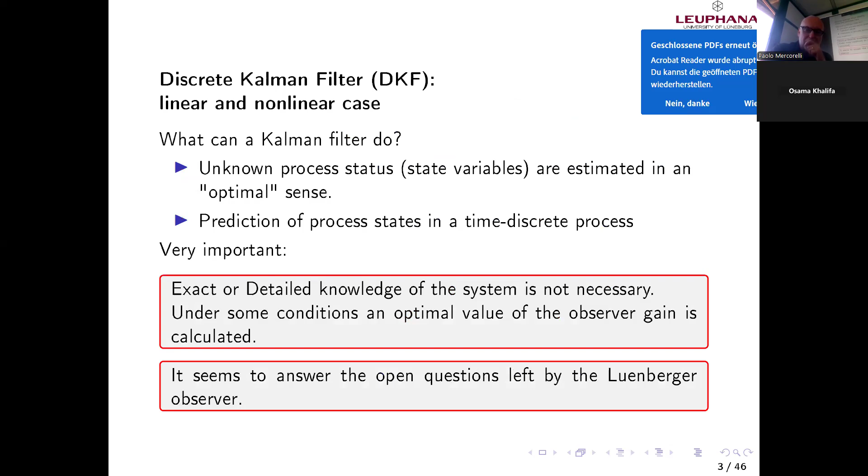This KM apostrophe is just an annotation from a particular book, where we consider radian per second instead of round per second, if I remember well. Anyway, it's a constant which characterizes the model. We can see that this constant here is exactly the same constant. Basically, the Lorentz-Lenz effect in the ideal case is exactly the same - it's the dual aspect between Lenz, induced voltage, and Lorentz effect. You probably know this coefficient better than me.

This is the continuous system which we want to control. At this moment, we want just to observe, to estimate something which we want. But the idea, as I told you last time, why do we need an observer? Because in particular, to control, we are here for cybernetics, and cybernetics means control.

In the most important, or nowadays newest control strategies, MPC, sliding mode control, we need the states, all states, very often. We have seen MPC, we have seen sliding mode control, because it's model-based. The control strategy is model-based. This means we have to somehow reflect the model into control. If, for instance, some variables are not possible to be measured or too expensive to be measured, they must be estimated or observed.

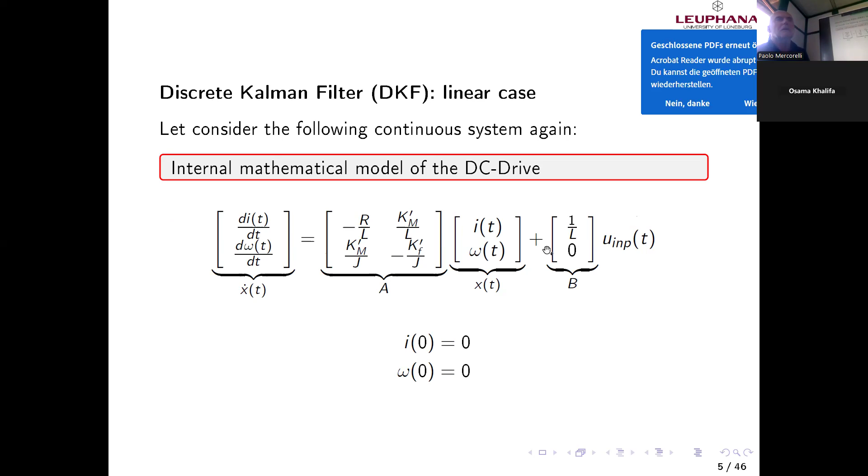Let me show you what I am doing now with the Kalman filter. Assuming it's too expensive to measure omega, for the controller, model predictive control, I need both current and omega in order to predict what will happen and try to control it. This is needed necessarily for both, also in sliding mode control because it's also model based. But let me consider MPC because I like it more.

This means I have to measure something, because if I don't measure at least one state variable which reflects one energy, the others cannot be estimated. I didn't have time to tell you about that, it could be later.

If I have time, I'll tell you later. Before designing an observer, it should be reasonable to check if the system is observable. Observability is the structural characteristic of the system, but also depends on what I measure. Sometimes measuring some state variables makes the system observable, measuring different state variables makes it not observable. If I measure everything, of course it's observable because I have information directly on everything, but we don't want that.

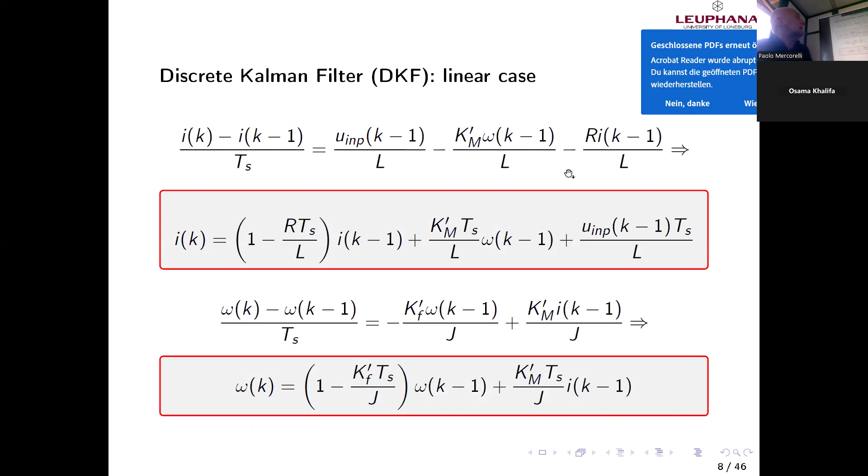You remember, I don't consider the noise. This is the limit of the Luenberger observer with respect to a Kalman filter, which considers also - we will see in a few minutes - something unknown, something which I don't know, or don't know perfectly, and noise, which is also something I don't know. Because the noise is characterized, if it's Gaussian - the hypothesis for today - we also have Kalman filters in which we remove this hypothesis of Gaussian noise, but even Gaussian noise is characterized by a sigma. It's not deterministic - this means we don't know perfectly the noise, or sometimes, as we will see, some parameters.

Here's a way to represent the discrete system using direct matrices. I would like to skip this because I told you last time.

Now, the Kalman filter. The Kalman filter basically considers the same elements as in the Luenberger observer, but look here - we are considering the system noise, in which the dimension of this vector is the same as the state vector x, because we consider the same dimension. This means we can associate to a state variable a vector, which is the noise. We will see that this noise, at least today, must be Gaussian, but we have also variations in which it's not necessarily Gaussian.

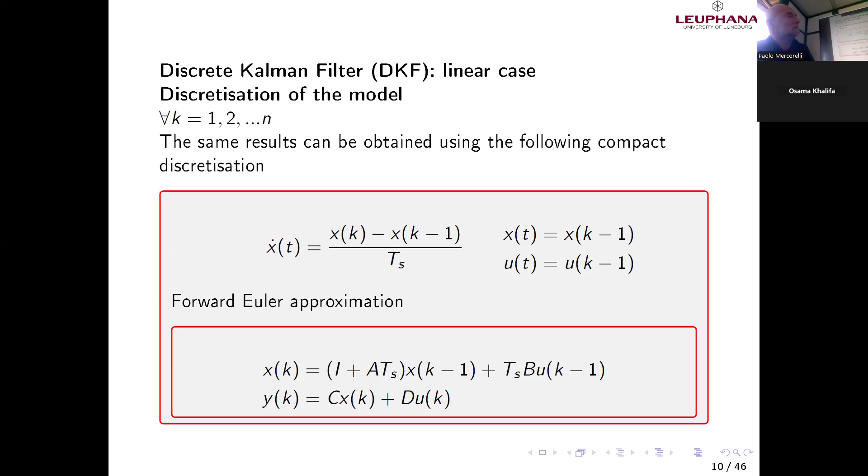We will see the Kalman filter, which is a particular observer. Assuming I want to measure the current, I want to estimate both, because it's always better to use the estimated instead of the measured. It's easy to understand - look at the word filter. If I have noise, probably - not always, it depends on the filter, it must be optimal - if I try to throw away the noise, it's better to use what I am estimating instead of what I am measuring. If I have a measurement totally affected by noise, and I filter it a little, I can assume that it's better.

It should be not too much and not too little, because if it's too much you introduce a phase delay. If you have a lot of noise and you filter it, you get a very clear signal, but it could be that you introduce a delay in the signal. Understand what I mean? Because you throw away also the dynamics which I want to have. This means it should be optimal.

A Kalman filter, it is. Here again, H was at the beginning C, and in the Kalman filter very often they use H. I copied this from a book, no?

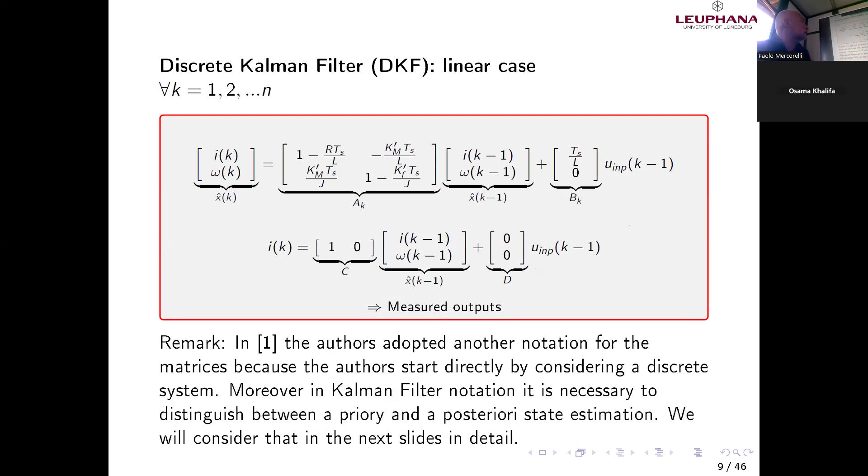In Luenberger, or in general, we use C in order to show you the analogy or duality between controller and observer. C becomes H typically, not always, in the Kalman filter. And Y becomes Z. The new thing is just this: we have a measurement noise.

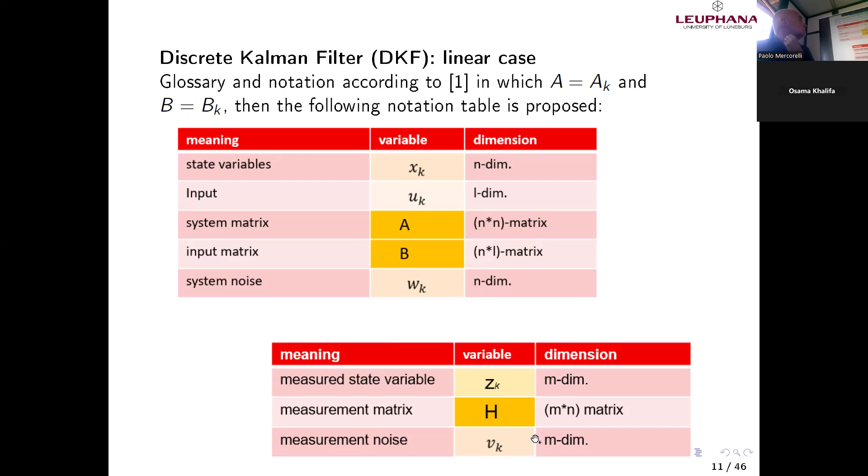I told you we have basically two steps: a prediction step and a correction step. Let me accelerate a little bit.

One minute to dedicate to show you again this slide, in which we can see what we consider now as the system, or better to say, the true system in accordance with the framework of Kalman, which has the deterministic part characterized by A and B, plus a stochastic one.

We can see the form is forward: K minus 1, K minus 1, K minus 1, on the right part K. In which we have also here, as we see in the Luenberger, but we have W K minus 1.

Look at this hypothesis a little bit, very quickly. We can see that the normal probability distribution in most cases for W and V must be Gaussian - N means normal, this means Gaussian - mean value 0, and characterized by this covariance matrix. Q is the process covariance matrix, process noise, better to say, and here is the measurement noise covariance matrix. Very important to repeat this hypothesis.

Basically, we assume that these two noises are independent. This does not influence each other - white and with normal probability, as I told you directly. Moreover, I would like to say, sometimes normal implies mean value 0, but it should be better to write mean value equals 0.

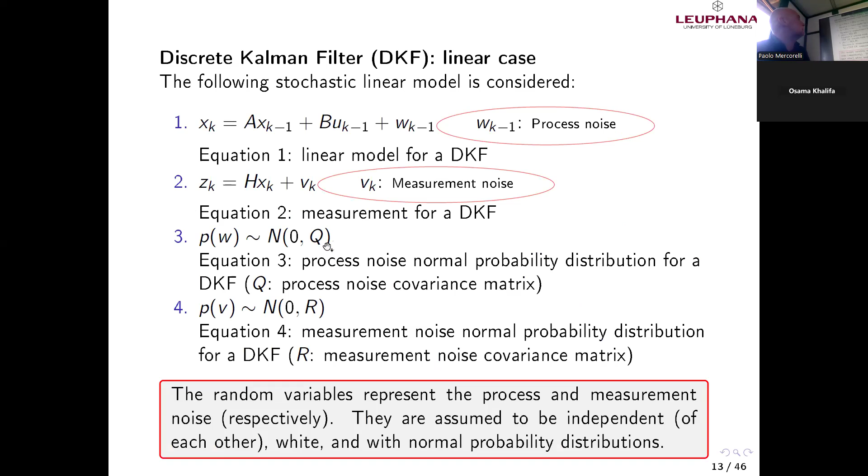Again, the definition of the covariance matrix, which I would like to skip because we have seen it last time. This matrix Q - the reason we are speaking about matrices is because you have many variables. This means we have to consider the interconnections in between, but here in the middle, colloquially speaking, in the diagonal, we have the variance. Sigma typically is the standard deviation, which is the root of the variance.

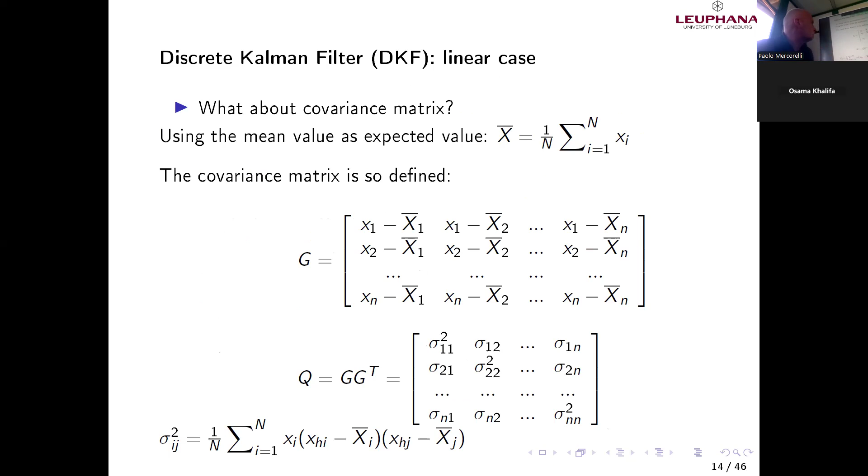Anyway, I would like to speed up. You remember I told you about the equation which is the a priori estimation of the state. This means, in accordance with the deterministic model, I can predict. Similar to what I told you in MPC. Now I have the deterministic model, I predict.

The prediction is based on the deterministic model, but please pay attention here - that is not like MPC. Look, here we have X hat, which always means a prediction, because it's not exactly the true value, even though I told you here the true is the Kalman true. Now we will come back to what is the true, because the truth doesn't exist.

As I told you, in accordance with some hypotheses, what I am observing, what I am estimating, is much better than what I am measuring. But what is better? At least we can say that we get close to the true, because the measurement is affected by noise. This means in the measurements, in reality, we have something which is true and something which is not true, or better to say, something which does not belong to the system or to the phenomenon, because it's introduced by errors, in a sense.

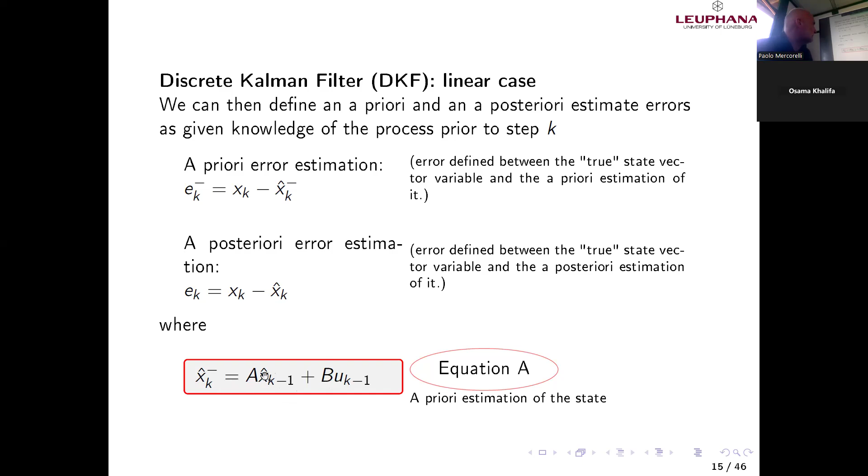We will use the previous estimating. Now we will see what x hat is. This is the true in accordance with the Kalman. This means what is the true in accordance with the Kalman? Is what I know, I assume that I know A, in my knowledge, assume that I know B, plus what I don't know. This means Kalman says, if the reality exists, it's what I cognitively know, plus what I don't know. It's easy to understand, this sentence could be acceptable, no?

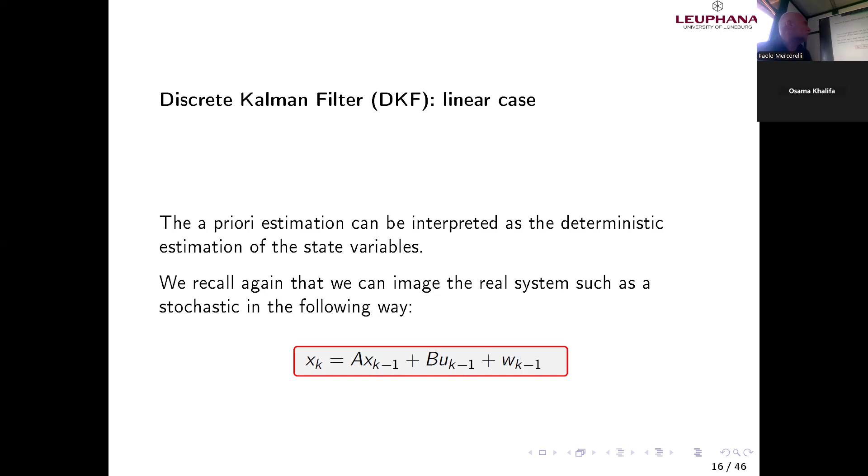The reality is what I know plus what I don't know. But what I don't know in this context here should be Gaussian and not only independent. And so what I told you also better last time, now I'm trying to do very quickly.

I can demonstrate, and I would totally skip the demonstration. I did a little bit better last time, that an a priori estimation of the error covariance matrix respects this law here. We can demonstrate it, because I can consider two kinds of errors. An a priori estimate error, which is the true, Kalman true, what I know plus what I don't know. This is the true. I can speak of the true just in the sense, according to the hypothesis, as a Gaussian, normal. I would like to add, to be clear, mean value 0, everything.

And another error is the a posteriori estimate error. And of course, I will generate also this a priori and a posteriori error covariance. I don't know if you remember statistics. Let me go ahead quickly, but you can find also in this slide many information about that.

Here, the a priori, I told you, is the true minus the a priori estimation. The a posteriori is the true minus the a posteriori estimation. It's not clear what this is, not yet. This is clear, what I know plus what I don't know. This is quite clear because at least I showed you what it is. Or even though x hat k minus 1 is not clear, because it's related to this value here at the previous step, because it's not clear what is x hat. But assuming that it is the estimation of x.

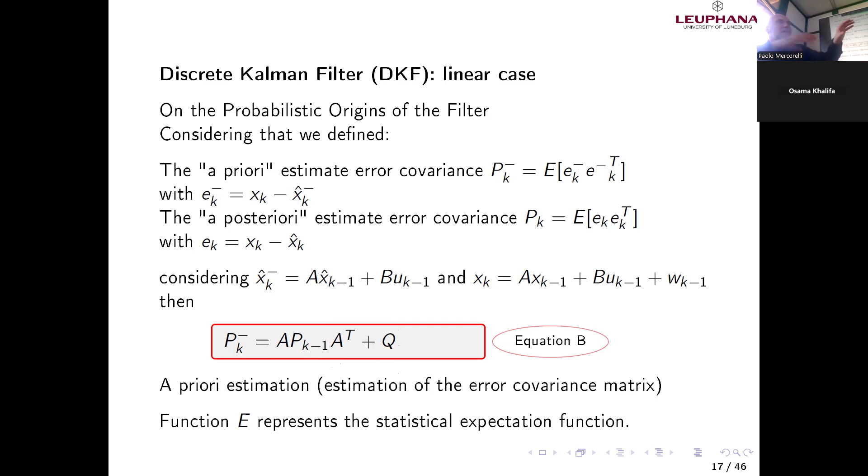Let me skip everything because we would like to apply this. Look at equation C. If I assume that the estimation of my true xk, the true in accordance with Kalman, can be considered as a linear combination between the a priori estimation, which is particular because it's recursive, plus k, which changes over time, multiplying this difference here, the name is innovation. What is the innovation? What I am measuring minus what I am observing or calculating, in the a priori, or better to say, the a priori corresponding variable. This represents somehow what I am estimating, which is a function of the previous estimation, if you remember, and basically the model which I know.

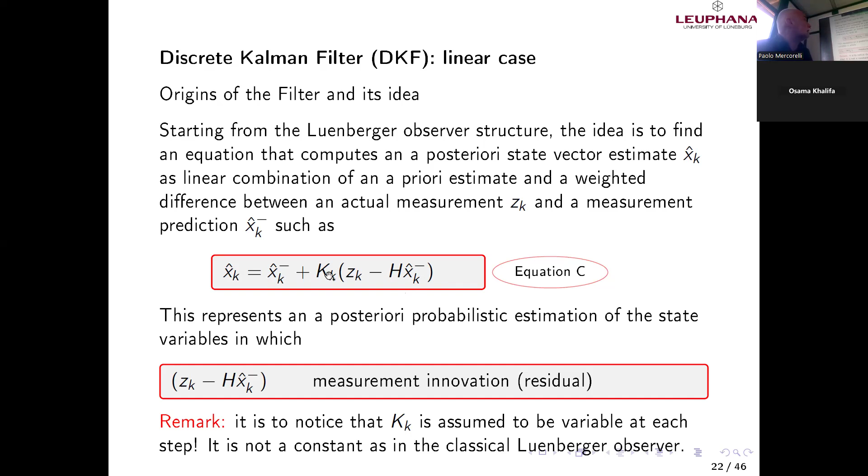This means this interesting combination. Mathematically, we can see that I can define an optimization problem to calculate k. Let me show you, let me skip this boring thing, but you can see.

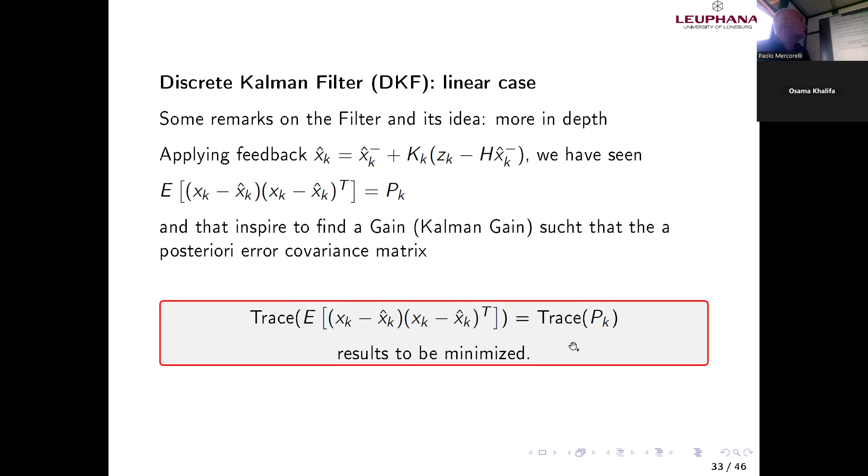Now, very interesting to conclude, if I try to consider the trace of the a posteriori error covariance matrix, we can see the a posteriori error. E, this means the expected, we define our a posteriori covariance matrix. And the trace, you remember, is the sum of the diagonal elements, the trace of P. If I do this boring calculation, trying to calculate k which minimizes this trace here, I will obtain, believe me, skip everything, skip everything.

How can I do this? I do the derivative of this expression here. It's extremely boring. If you replace here the expression of Kalman, what is there? This was already shown, yeah. Believe me, it's extremely boring, but not too difficult to do this derivative. It is enough because the problem is convex. You have the linear system and the quadratic function, which is the sum of the diagonal elements. It's a convex optimization problem.

You know what convex means? Just one minute, just take this as a definition: you don't have many minima. We have to look numerically. We have an expression of k, which is this one, kk, which changes at each sample time, because everything changes, everything is there. Let me explain this colloquially.

Very interesting that everything depends on R and everything depends on Q. This is a really important key point. Q is here inside, I don't know if you remember. Q is here inside.

Extremely important because this Q and R, we will see together this another parameter which I will introduce now, which is the initial value of pk. It's something extremely interesting philosophically, because the reality is not possible to be known.

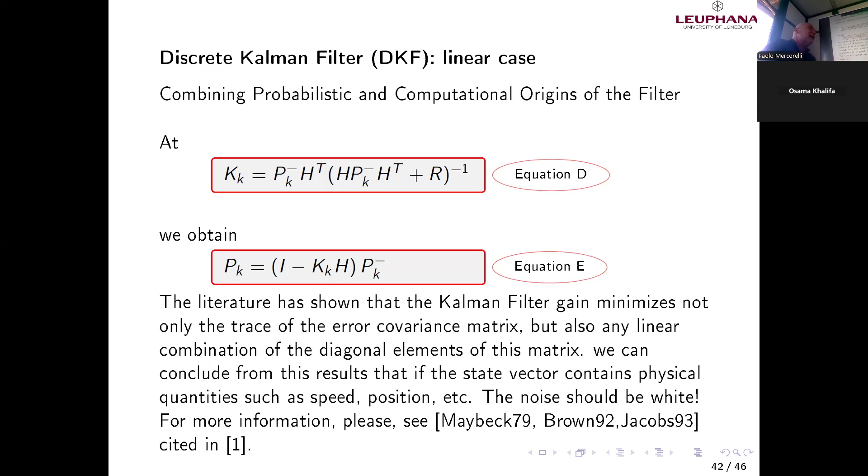Okay, this is the 5 equations which we need to implement in the linear system, which depend on Q and R, but also depend on the initial value of P0 or pk. We can see here the initial value of pk is the initial error. Remember, I told you at the beginning, if I don't know the value of current, if I don't know the value of omega, I have to put something, and this is reflected in the initial value of P.

Look here, in order to start, basically, I need Q and R. I need the initial value. We can see here, initialization of the state, and I need the initial value of the error. They are connected somehow.

To initialize. This is not so dramatic if I don't know this, because the Kalman filter can correct if I know Q and R. Q and R is not known. We cannot know it because the reality cannot be known. Also, we will see on the controller, we always have to tune something. Always. Of course, with artificial intelligence, we can get information at each time in order to estimate this parameter. But we can never say, now I know everything. No, the reality changes.

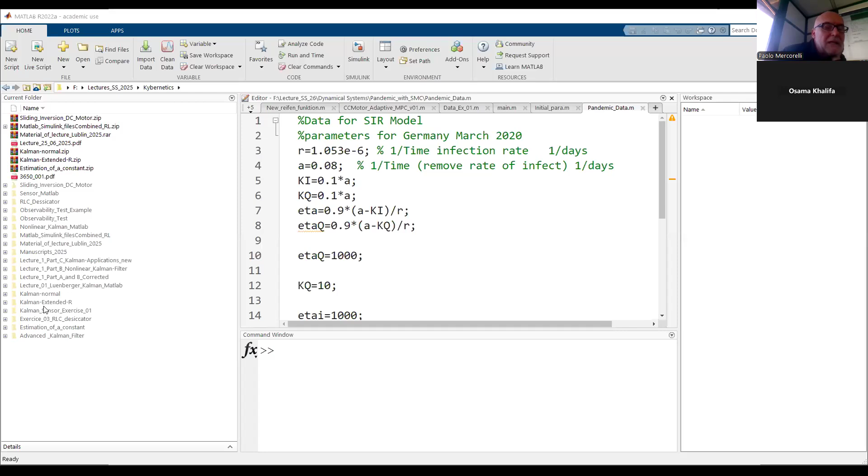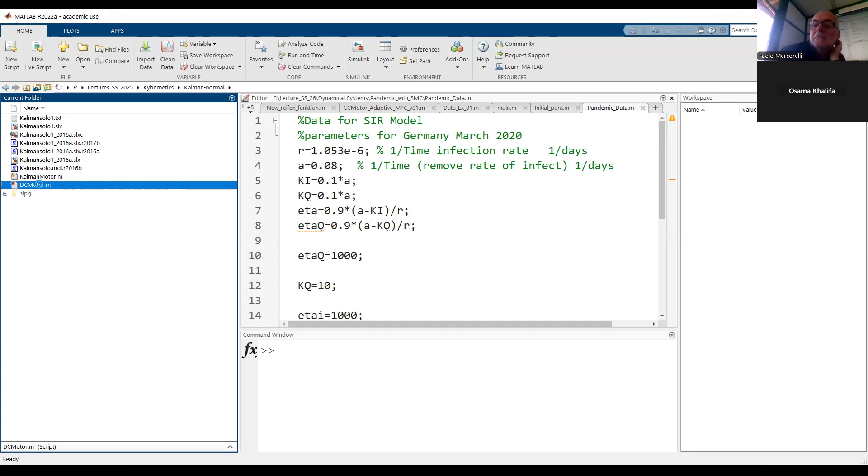Did you see Kalman? Okay, here. Let me open this DC motor. You can see that we have the motor, which you already know from MPC and so on. I don't need to comment too much on it. It is the real motor, but very small.

As I answered you here in one slide, probably you asked me about an error, but do you remember I told you it was correct in MATLAB? Yeah, MATLAB was different. In MPC. But I answered you, probably it's a LaTeX problem. Was it in the LaTeX? I think it was in the model, the model was wrong and the LaTeX was right. We can see here I put it correctly. Yeah, this is correct.

But in any case, don't trust the professor who does make errors. It's so, because how is it possible to say also here? The reality is in a form of error. Kalman understands this very well, and the idea is to distinguish or to minimize the error. Free from error doesn't exist in any reality. Also, the truth of Kalman is what I know plus what I don't know, which is an error.

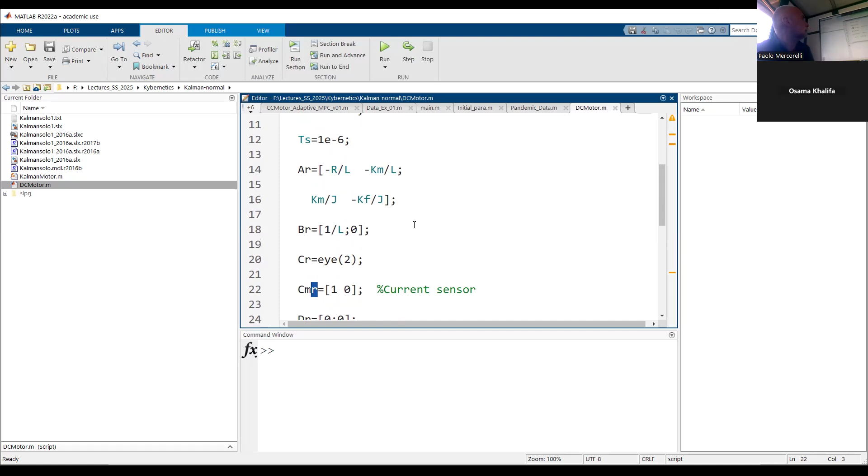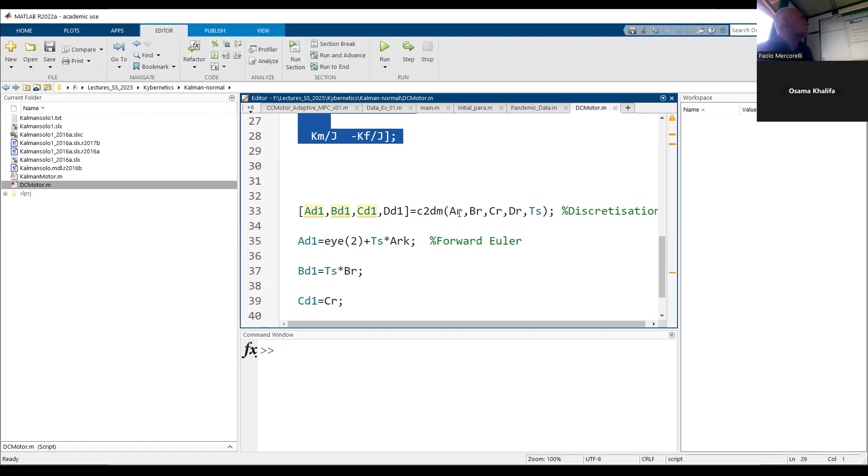Here I don't see any difference, I don't know what we have, this representation is the same. Here I use Euler. Probably we tested something, I don't know what. Here we have a possible discretization based on MATLAB. I think this means continuous to discrete mode. If I don't put any specification, I think this is the exact discretization. I don't know if you remember, exponential up to z, exponential up to minus ts, something like that. Anyway, it's another kind of discretization.

Here, we can see it's the last, because sometimes students ask me to test the performance with different discretizations. I can do it, but I don't have time here. But probably you already know, yes, it's forward. In backward it's a little bit different. Everything here is forward. Anyway, we can see that we use this forward. Let me run.

Basically, what we need here is the discrete model, or in this sense, the matrices. Let me open, I think this one. Let me see if this works. It's opening, yeah.

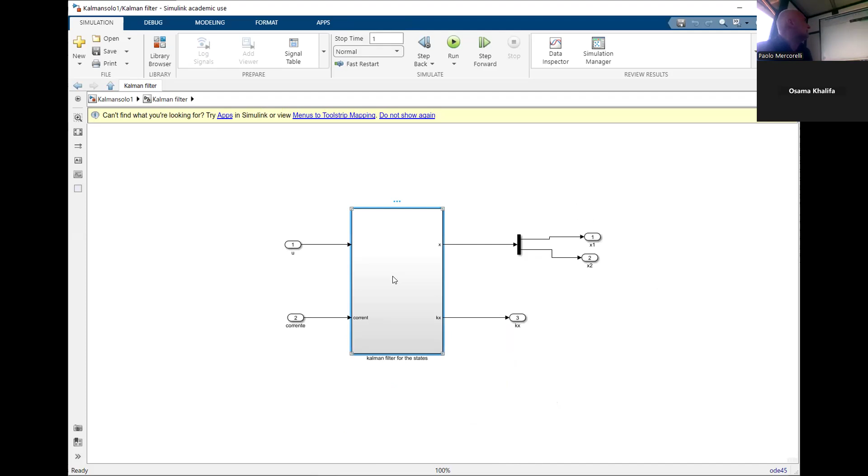Here is just for if I have more time. Anyway, let me go ahead here. Here is just the presentation. It's a shame, but not so much of a shame - I'm not using this embedded function. I'm using the interpreted one. I think it's also in MPC that I use the interpreted version.

The idea is that, in my opinion, didactically and practically, we always use embedded too, because we can flash out the electromechanical control. Here we have to explain what 'flash out' means. Let me come back to clarify this concept, because it's important, for example in Kybernetik, but probably you already know it.

When we are satisfied with the performance, we can, let's say, optically see what happens in the comparison, or we can measure the integral of the squared error, or we can look at the diagonal elements of the a posteriori covariance matrix. I forgot to say, but last time I told you, that here we minimize the sum of the diagonal elements.

But there is a theorem that says if the hypothesis guarantees minimizing the sum, then each single element is also minimized. This means the error of the current, error of the velocity. But it's a bit more advanced, and there's a demonstration, because they are orthogonal - I give you that as a keyword. This means to minimize the sum, I also minimize the error singularly. Think about it - in German it's called a Dreieck, a triangle with 90 degrees.

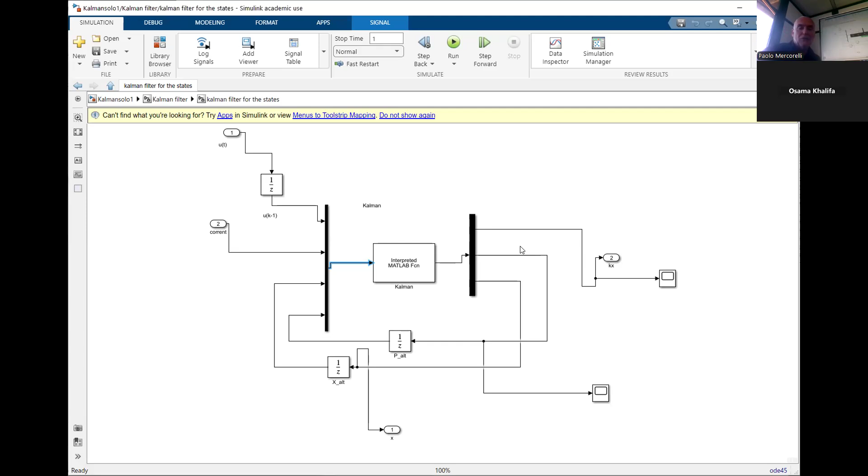This interpreted block is organized so you have to declare the number of outputs and the function which you call. In embedded, you don't need to, because you click it and it appears directly as the M file, which is this one.

Let me show you the M file. Let me share. I don't know, did I share? Yeah, I think so. Okay, yeah, it's there.

Sometimes I use the same name, but it does not matter. This is the name, but it's not the name of the function. It's the name of the function, but not the file. I'm more happy to work with embedded.

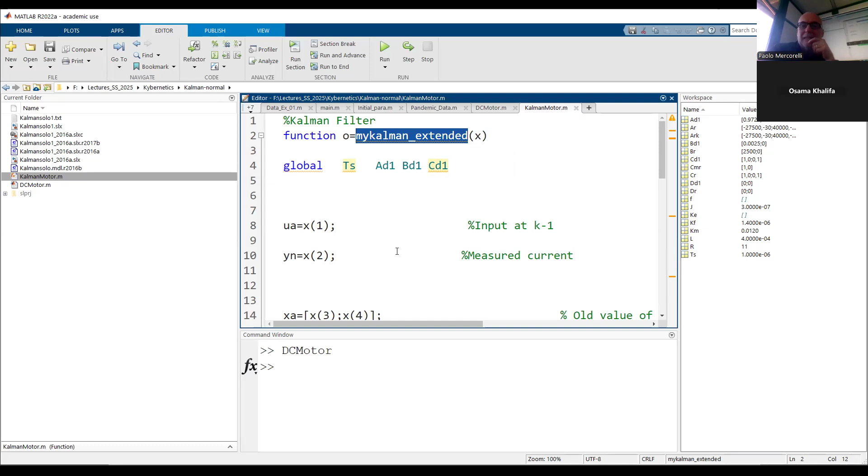Global, because in this interpreted block, we need to transfer from this value here. Otherwise, you don't need to, because you can put also here, as in the embedded, if I remember well, you can put it also here as an argument of the function.

But probably you know better than me about embedded, because I always use an already prepared file. I don't have time, but I think we can put it also here. Anyway, it's clear, no? X, what I need each time, should not be fixed once for all. I have to calculate each time, coming from the previous. And here, at this moment, I'm assuming that I don't have any changes in the parameter. Now we will see exactly what happens.

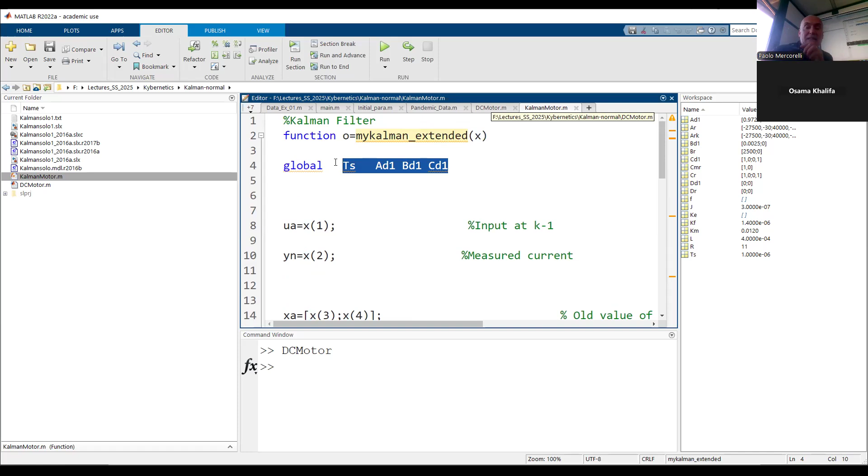UA, I mean, X1 was the input, the delayed input. I call it UA. The second variable is what I measured. If you want, I come back to the Mux. Do you want to see the Mux? This is yn, which is the current, the second one in the Mux.

And then the fourth one is this previous state, coming back from the output. Basically, x hat k minus 1, because it's delayed. Excuse me, today I'm going fast, but they come back then.

Now here, we can see that in this case, in the embedded block, I have to reorganize the four values which we have in the Mux. The Mux is something which vectorializes, basically organizing into a column vector, if you want. Then I have to consider elements 5 and 6, and here you have to consider the row instead of the column, and then I have to put also elements 7 and 8, which is in the column in the second row of the covariance matrix.

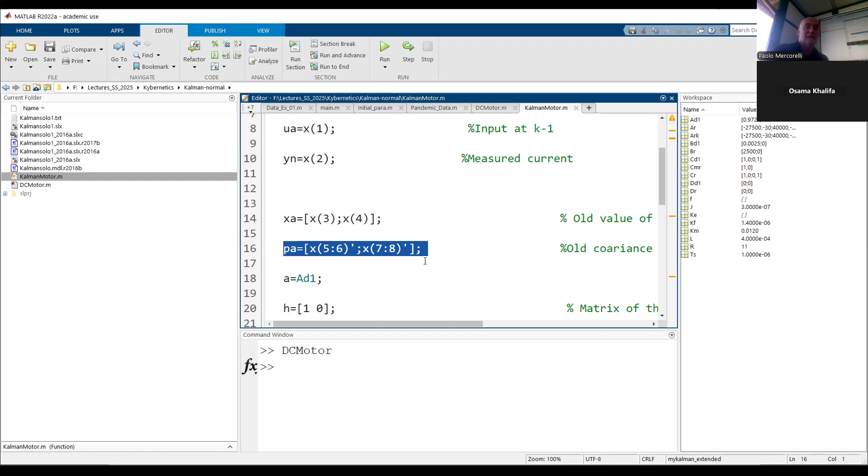And in this sense, this is the a posteriori covariance matrix, Pk minus 1, because it's delayed. Here it's already delayed. X is delayed, x hat k minus 1. Yeah, I changed the name. If you don't want changes, it does not matter. I don't know why I changed it.

We measure the current, first variable. Here I change again the name. This is a possible variance of the measurement. This means I trust the measurement.

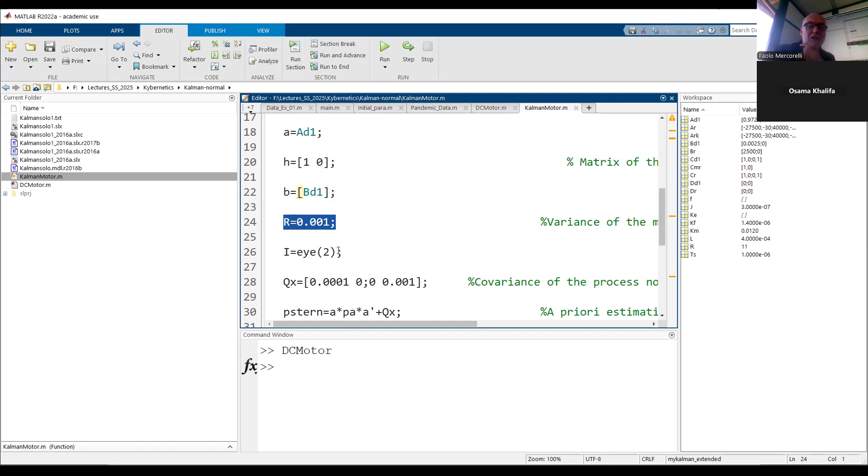Look here, you remember the concept from last time? Small r means small uncertainties in the measurements, because r represents the variance, covariance. In this case, it's the variance, because we have just one measurement. It's easy to interpret, and a small variance means relatively small. Very small doesn't mean anything by itself, but anyway, we will see it relative to Q. It's very small, if I remember well, when we look. This means I trust the measurements a lot, meaning that I will weight the innovation more.

KK will be emphasized, larger, because remember, R is present in the denominator of KK. I show you this in order to understand this concept. Let me conclude here. QX, where is QX? Here.

It's not so much smaller. It seems that I trust more, I trust the measurements more. But let me show you this aspect, it's extremely important, which is written in the slide. Look, a larger value of R means a small value of KK conceptually.

Larger with respect to Q means very small KK, because R works in the denominator. But a very small value of KK means that I don't trust the measurement. Why? Because everything which came from the measurement is minimized.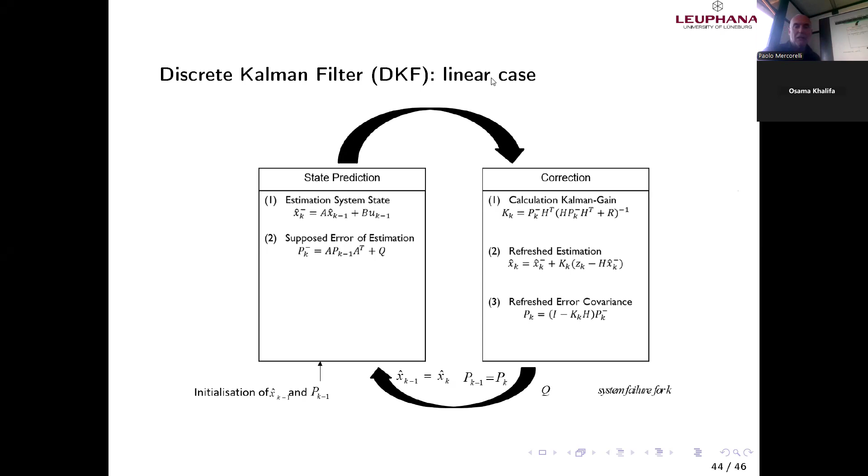Let me run a little bit. Before running, let me conclude with the file. Yeah, look. Okay.

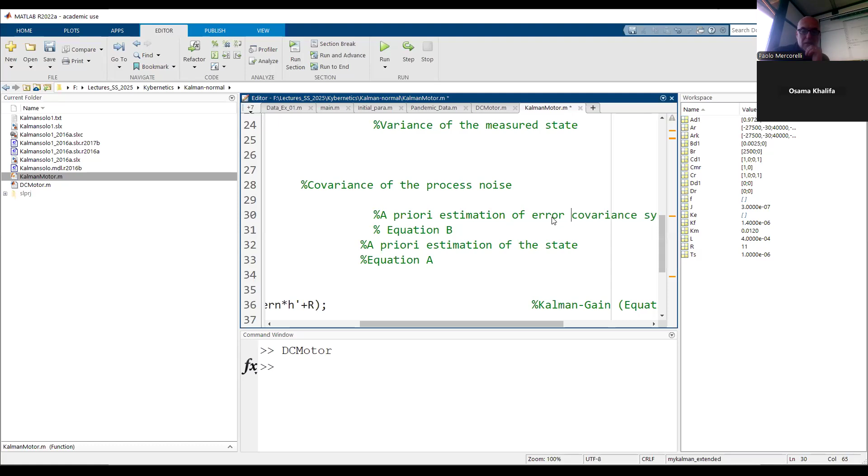Here we have the matrix, the equation B, a priori - excuse me - estimation of the covariance matrix, error covariance matrix to be precise, but it doesn't matter, sometimes it's so. Equation B. Then we have equation A,

the a priori estimation of the states, in which here is x hat k minus 1, because it came from the previous step, which is delayed. And also B is the map of the input, multiplied by u k minus 1, which is delayed. But this is not derived, this is directly from the measurement, the input. Here's Kn, the Kk we called in the lecture, equation C.

And no, excuse me, this is equation D. This is equation D, which came from this hypothesis, which is equation C, after the optimization method or procedure - the derivative of the trace of pk with respect to kk. And the solution is this.

Excuse me, the solution is this, of the derivative of the trace of pk with respect to kk. This is the solution. And what is pk? This. The calculation is boring, but it's not difficult.

Is the output. And the output, this is just to monitor, for debug, to look at the performances. I don't have time to tell you about that. And then we have the new estimation of the a posteriori covariance matrix, and here the new states. And then loop again, loop again.

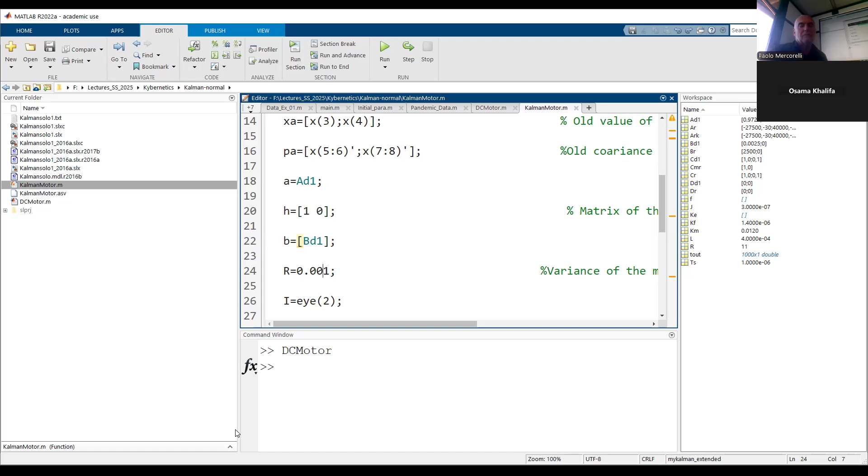Let me do what we originally wanted to do. Let me trust more the measurement, right? In this case, let me reduce this. If I reduce this, indirectly, I trust more the measurement. I have just two possibilities.

Trust the measurement or trust the model. Of course, the optimal is always a little bit in between, therefore neural networks... No? But let me check what we are waiting for.

Now I'm increasing Q. This means the model is not so trustable as before. This means I trust more, yeah, I trust more the measurement indirectly. Check if I told it correctly. No? Let me see what happens.

In my opinion, it should react quickly, but also with more noise. Let me see if my thinking is correct. Sometimes, did you agree? Yeah. Because you have to run them, save them, but I think if I run it, it saves automatically, no?

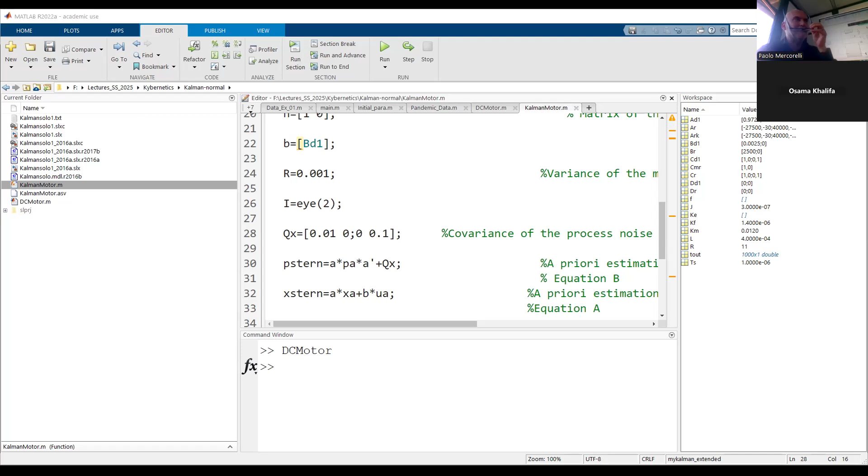Maybe no, I don't know. I don't remember this option, previously.

Not much difference. Yeah, a little bit probably. Yeah, or because before we reached the 0.8, now this is earlier, a little bit, no? Or not? Oh. More or less the same, a little bit earlier, right?

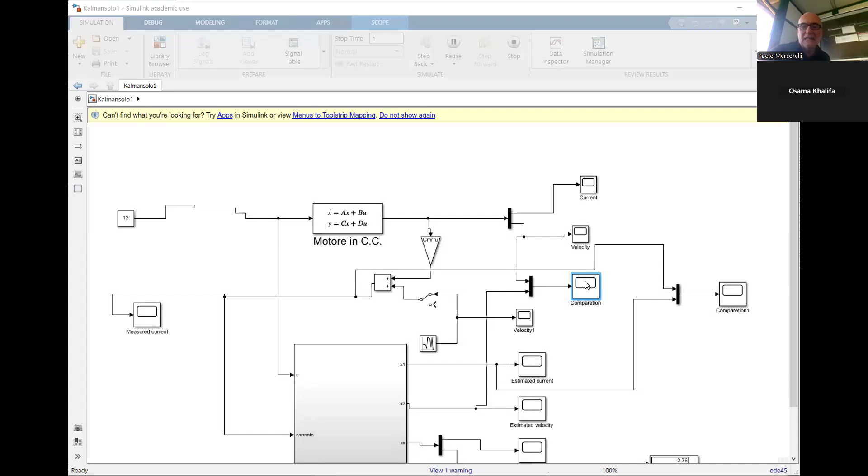Let me increase a lot. But you can see a little bit more noise, not much. Let me do it again. I remain here, but believe me, I am doing it. Let me try to do something like that.

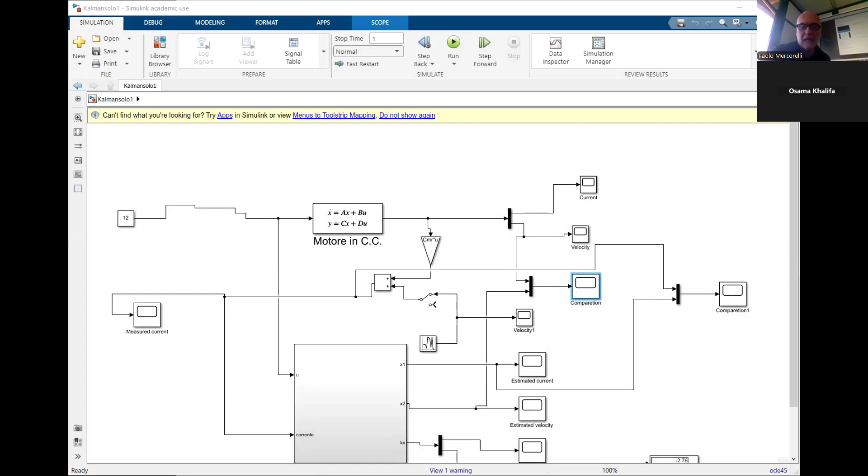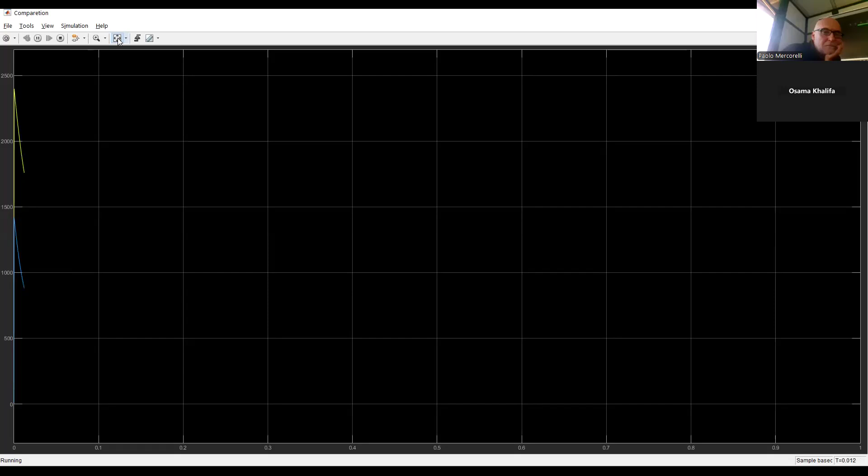I shared the form, no? I didn't share, but it doesn't matter. Let me show. Where is it? This is.

It could be that we are in a saturation situation. Let me tune again. Yeah, we don't have what we want to have. It could be that we are... you see now? But I think we are already in saturation.

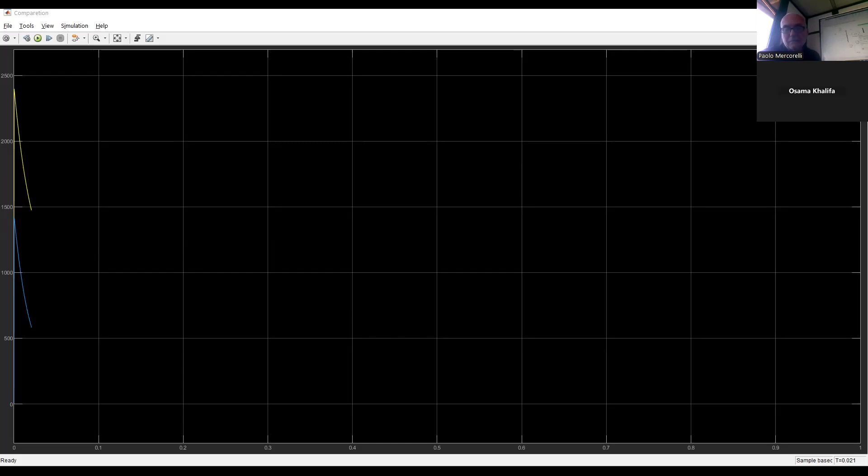Let me try again with a better P0, should give us... okay, it's very lazy. Look, this is really something which must be clarified. If I put 0, I don't know if you see now at all. If I put 0 in P0, this means, where is here? You say into the Kalman filter that you are already at the goal because the initial error is 0. This means you don't have to do anything.

Because you already, if you put 0, you're already at the goal. Because this is, let me say colloquially, the initial error. If the error is 0, the Kalman filter is quiet. It's sleeping, because that's the minimum possible error. And before, understand, we are basically in a steady state situation in which we cannot improve its performance in this sense. Let me show you what happens now.

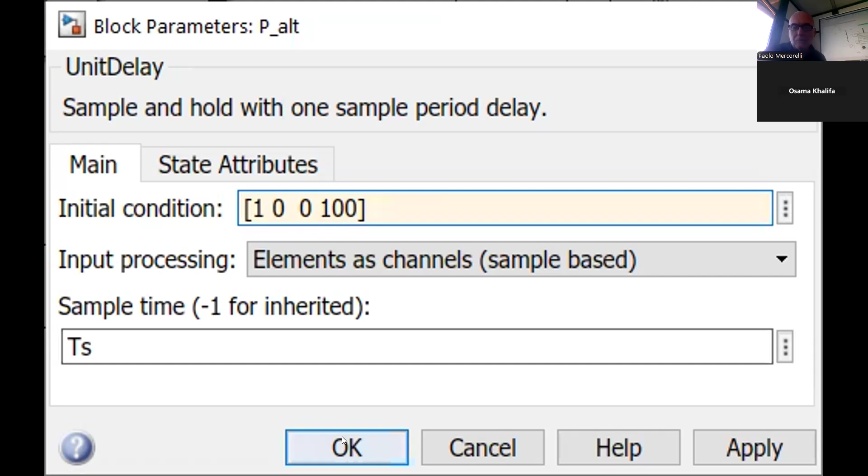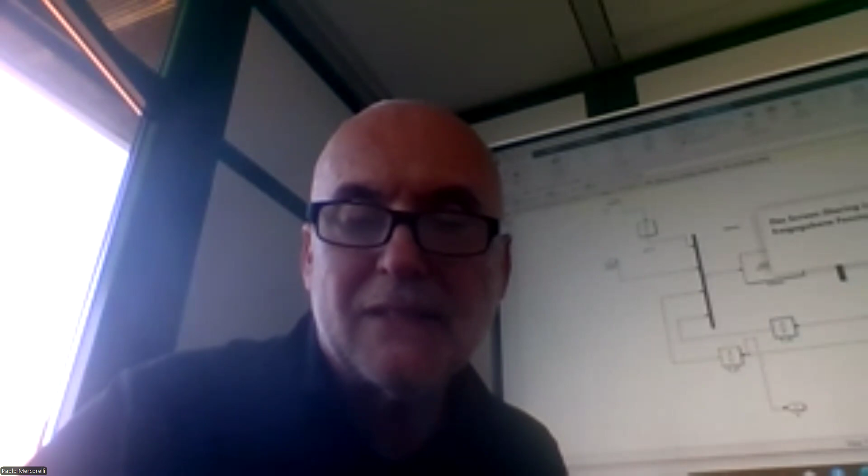What is? Yeah. Well, nothing happens. But it should react. Why does it not react? Now I have to proceed with the nonlinear. Let me try it again. Why does it not react? Should react. Otherwise, there is an error somewhere. Check at home why it does not react. Could be that there is something which I... No. It could be that really...

Ideas? Is there a problem with the resistance of the motor, and so, because you're using 2 times the same variable? No react. Variable. Oh, too much. Yeah, 1 second. This P is too much. But it seems to be the reaction there. This means, yeah, let me quickly try now.

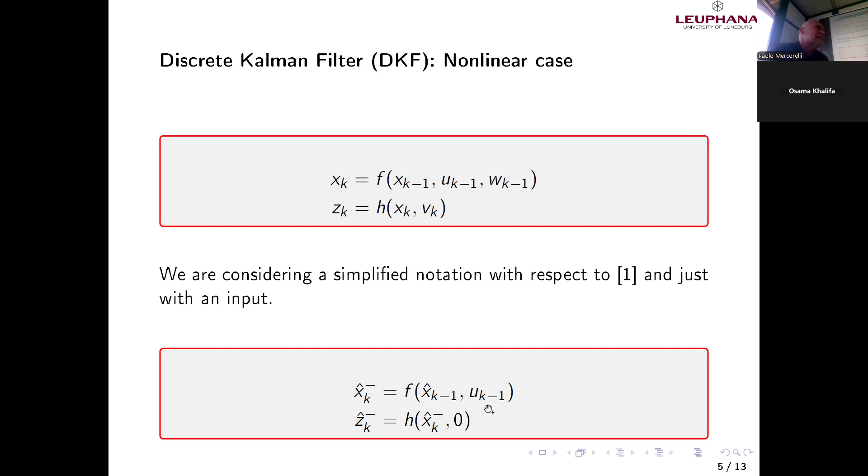Yeah, the output could be also nonlinear. Now we will consider just the states nonlinear, but the nonlinearity could be in the dynamics, but could be also in the output equation, which at this moment we have seen just in a sensor, but could be included also in the model in the output equation. This equation here is formally the same, but the matrix A is written somewhere—I think it's probably later—is the Jacobian matrix of my field.

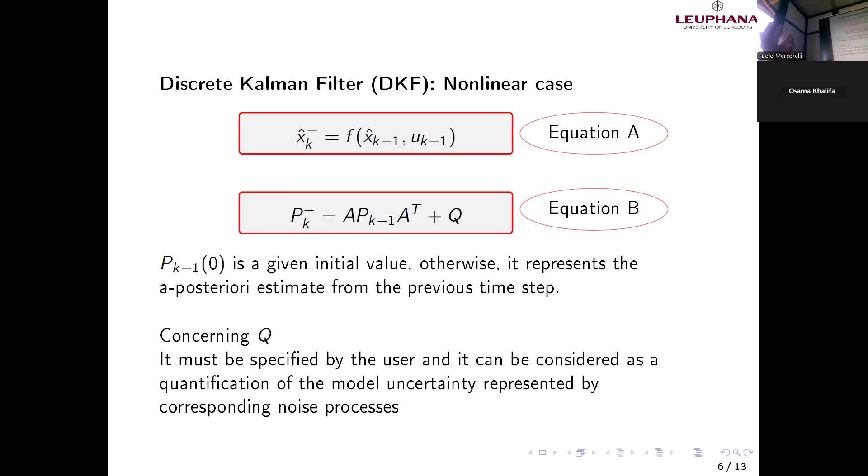The field is this. Basically, it's, roughly speaking—I don't have time to tell you much—but it's interesting nevertheless; if you look at the lecture, there is really an interesting, more clear interpretation of the Taylor approximation. But you can believe me, the derivative is always related to the Taylor. Of course, here we have 2 variables. This means we are speaking about the matrix. This is Jacobian, probably Matthew remembers, no? Jacobian matrix.

Calculated, we can see here, at the previous estimated state. Therefore, I told you in linearization, when I say it's linearization of the nonlinear system, it's not totally correct, because inside the Kalman filter the nonlinear system remains. We have to see this a little bit more theoretically, but keep in mind the EKF is a linearization around one possible approximation.

In the UKF, we have the linearization not only here, but on the sigma points, basically at the point on the variance. In this sense it's more detailed, but of course then we have to sum up somehow this information. The calculation load is much heavier, but both are related to the same hypothesis. We linearize considering not only the possible mean value, but also the sigma points.

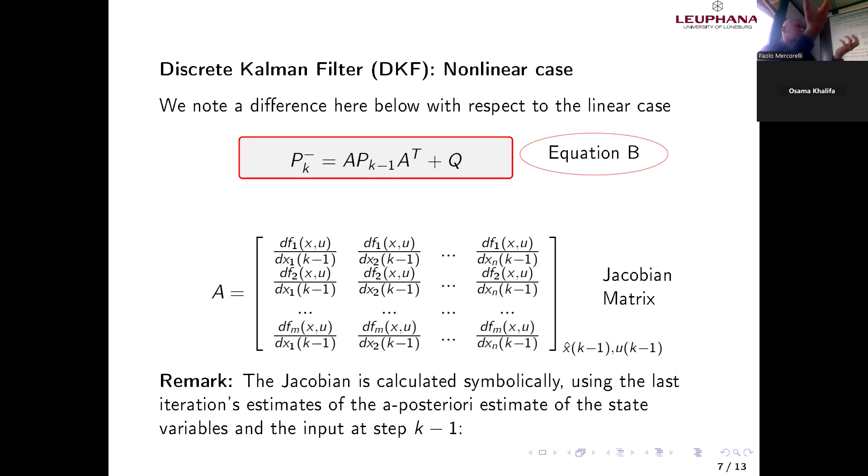So just to give you also the nomenclature of sigma points. But of course we don't know exactly where the sigma points are, so this means we put some points. Anyway, the rest is the same.

The unique difference is if the nonlinearity is in the output: instead of here the a priori estimation, we put the output function as a function of the a priori estimation. Do you remember here it was H capitalized multiply by xk hat minus? What H capitalized is here is the Jacobian of the output. This is the unique difference.

Let me see if it's written here. Yeah, it's written here. Everywhere H capitalized before was also the Jacobian, because the Jacobian H was [1, 0]. But it's the Jacobian of what? Of I. If the output of k equals I, the current, the Jacobian of I is [1, 0].

Look a little bit at home: H capitalized as before is the Jacobian, and here we have directly a nonlinearity. But it's as before, because before we had H multiply X, what we measure, xk hat minus. We measure H with the Jacobian multiply xk hat minus. Here we put directly the nonlinearity. This is a bit the sense, but it's similar as before. No? Before we didn't change anything in the output.

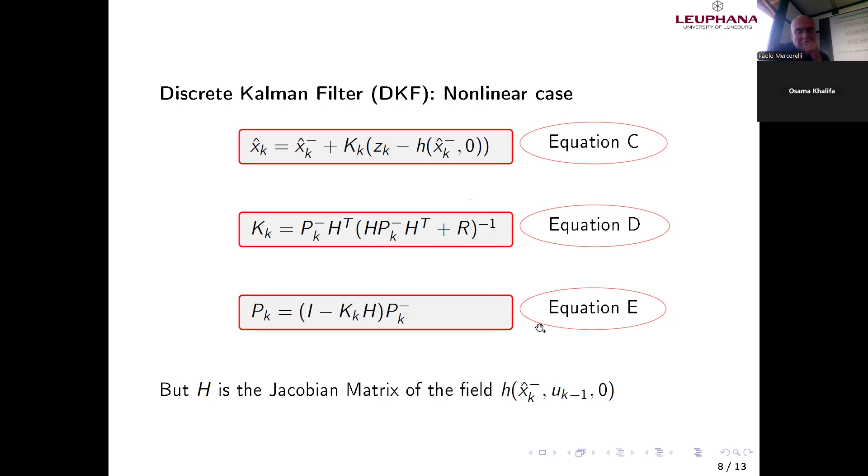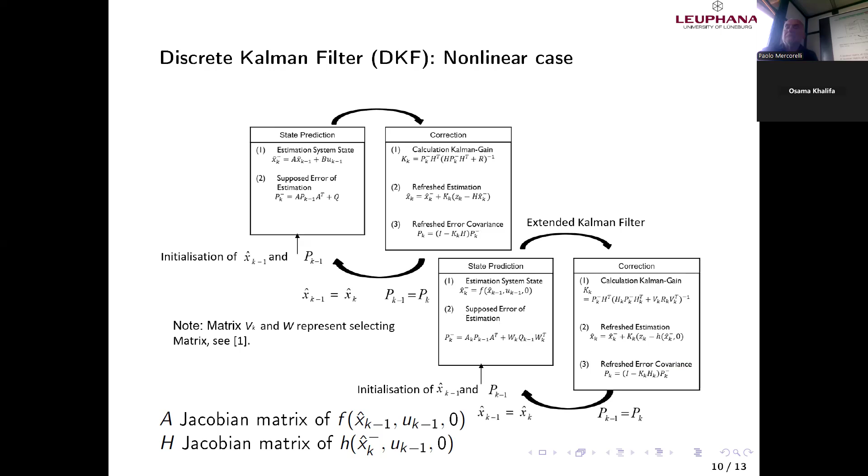Here a little bit more in depth about the Taylor approximation, but let me go to the simulation. In particular, I would like to show you a nonlinear representation of a system in which the system is linear, but because of the estimation of a parameter, we end up in a nonlinear representation in the microcontroller.

This is more interesting than, let me share, a nonlinear system, a physical nonlinear system, because here we have nevertheless a nonlinear system which in many applications is very useful. Look at this, look at this problem.

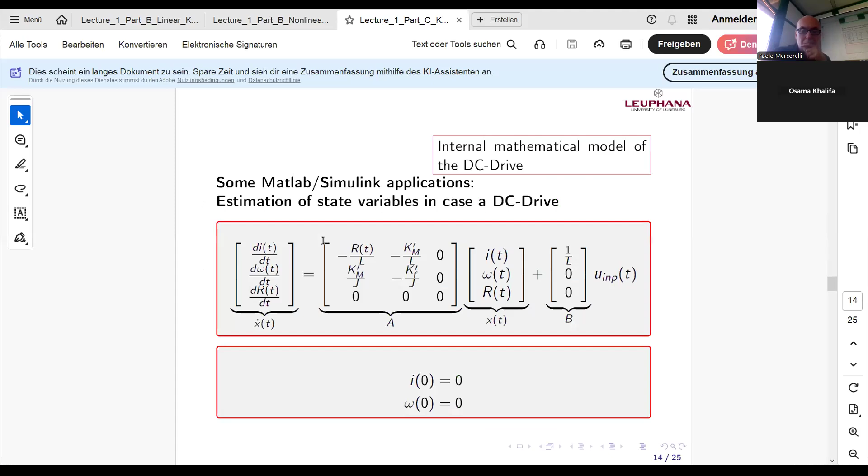The problem which I presented before, but assuming that we have a resistance to be estimated. I mean, assuming that I don't know the resistance — you can consider also L, you can consider also J. How many parameters can I consider? Here it depends on the observability, I don't have time to tell you. I can enlarge — we can see here, with respect to before, we have 3 states.

Because I consider what I want to estimate as a possible state, I end up in a nonlinear system. Why that? Because we have the product between R, that in this representation is in a state, which multiplies another state. And multiplication is a multivariable function, it's a nonlinear function.

We can demonstrate this. I can also augment, we say, an augmented state, considering L also. I can do that, and the system remains observable — we can demonstrate that. But of course, increasing another parameter, I cannot find this observability, and the Kalman filter doesn't find the solution, because if the system is not observable, this means I don't have enough measurements.

Or look at what happens here: 0, 0, 0, 0, 0. I have in the matrix information that is not deterministic based. Why is that?

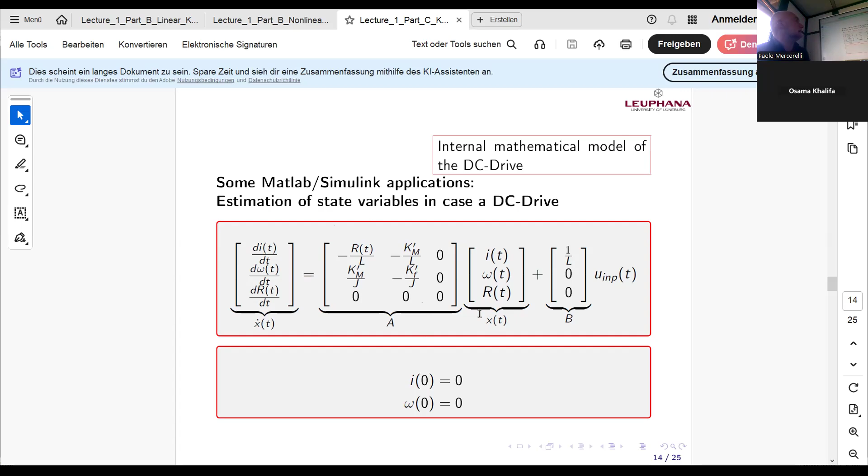Because the derivative of R equals 0 means that deterministically it is a constant, as we want. R isn't a constant, but inside the Kalman filter it is a constant, a Gaussian constant, characterized just by its... in this case, in the state, Gaussian density of probabilities by mean value 0 and its variance, which determine also the covariance matrix 3 by 3. We can see this Rk is a constant because Rk is equal to Rk minus 1.

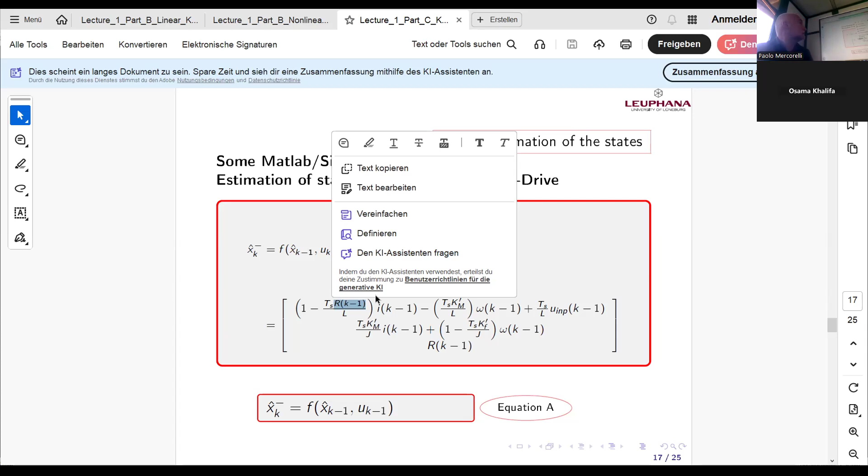This is the model. Once I do the discretization, we can see this nonlinearity. Rk minus 1 is an augmented state which multiplies the current. In the representation, if I wish to estimate the parameter, I end up in a nonlinear system, even though the system is linear time variant, because R can change over time since it changes with temperature, but I can consider it as a variable which changes over time.

But in the representation, at least in this representation, it's a nonlinear system. This means you can see that I am using what I told you until now, I repeat it also for you here. I'm using now the Jacobian, and believe me, it is this one. You can see 0, 0, 1, because if I consider Rk equal to Rk minus 1, the first two components are 0, and then we have the derivative of Rk with respect to Rk minus 1, which is 1, because the derivative of Rk, which is equal to Rk minus 1, with respect to Rk minus 1 is 1. Try to do it at home, I think no mistakes.

Now I show you directly the simulation. This is all, the rest is again the same as in the linear system, because the nonlinearity is in the state. It could be also in the output. We have to consider also the Jacobian of h, not capitalized, which I indicated with H capitalized, which here does not change because I measure the current. Let me simulate, and then we conclude this lecture of today.

Let me see, five minutes.

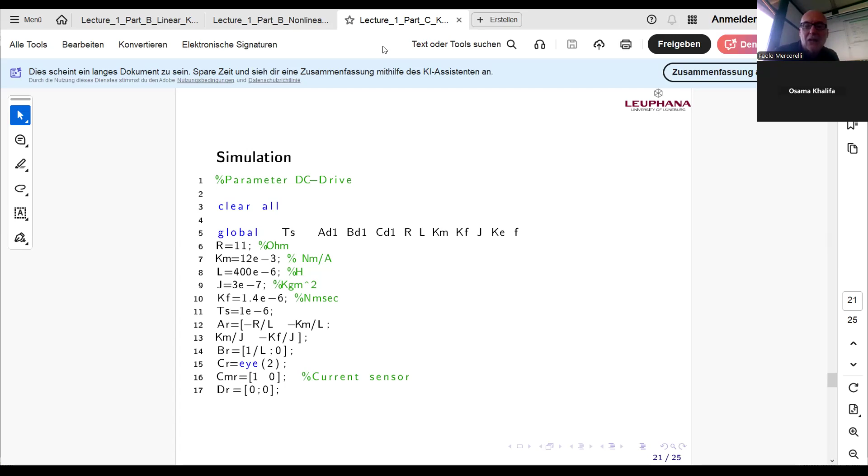This means, just a second, let me open... yeah, extended R, look. I will share the M file. I don't need to explain, I think it's exactly the same, but it's useful to go to the right folder. I will upload everything. Now let me open this. Where is it?

Extended Kalman filter, as I told you, using an augmentation of the state. We fall down to a nonlinear representation. What is interesting for us is that it doesn't matter if the system is linear or nonlinear, it's the representation. Keep this in mind. Also in the test of observability, we don't test the physical observability, we test the representation of it, because the physical system does not exist. I mean, God knows where it is. I don't know, it's a little bit crazy, but it makes sense.

I was at a dinner with a mathematician together with my wife. The mathematician told me, Paolo, we have to converge as soon as possible to the virtual surface, sliding mode. And then I said to myself, the virtual surface doesn't exist. My wife looked at me, like, this is strange, we converge, we reach something which does not exist.

Therefore, probably the difficulty in this course is that it's a little bit another language, a little bit extremely abstract. We are looking for something which does not exist, but just in our fantasy, to describe something which I assume we perceive, and something which cannot work. Kalman filter cannot work. A little bit strange, no? But it's interesting, believe me.

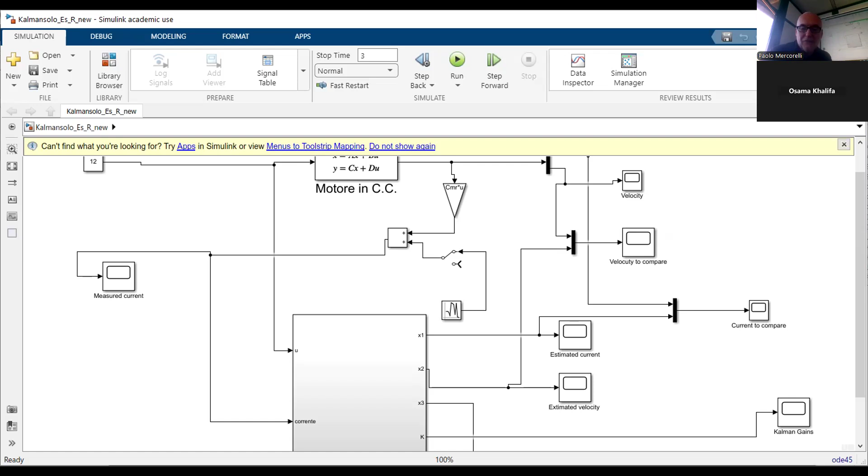Okay, basically, what is the difference here? The difference is that here I have a resistance with an unknown value. The value is in the M file, 11, excuse me. Here inside I put another value, and if you look inside at this, again in the file, it's 0, I think. Look what happens, the rest is the same. Of course, everything is now 3 by 3. The covariance matrix is 3 by 3 because we have 3 states.

The last state, R, is an augmented state. It does not exist as a state, but it's our augmentation, because as a state we have the possibility, if the system remains observable, to estimate it. Because for Kalman, it doesn't matter if the state exists or not. In the equation, once you put it with the derivative, it's a state. Remember my concept of the state.

Because if something changes, please pay attention to this concept: if something changes over time, this parameter also changes the energy of the system. But this is clear—if the temperature is there, at this moment the temperature is not considered as a state. Otherwise R is a function of the state temperature, and the temperature is a new state, always in a nonlinear system. Because R multiplies the current, but in this sense R is a function of another state.

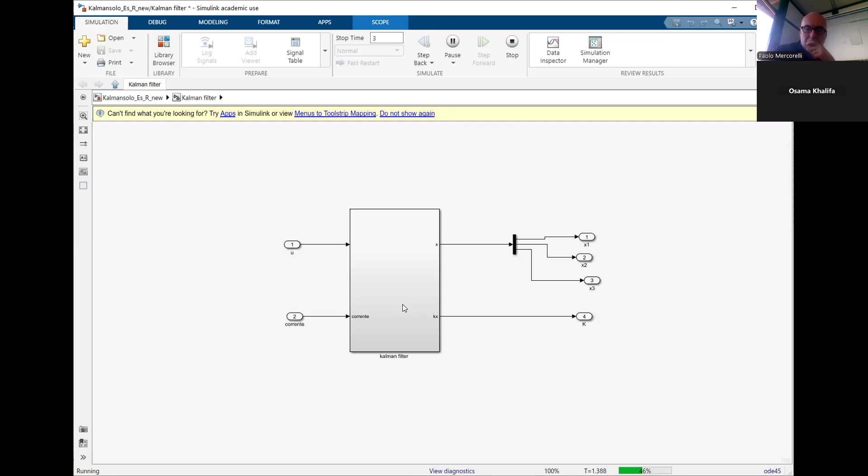It's correct. This is the actual initial value, because here we have the initial value of x. Let me...

What I'm doing now here... it seems to be slow, not 3 seconds. Anyway, you can try. Let me see what I put here. Seems to be here, 0, it seems to be.

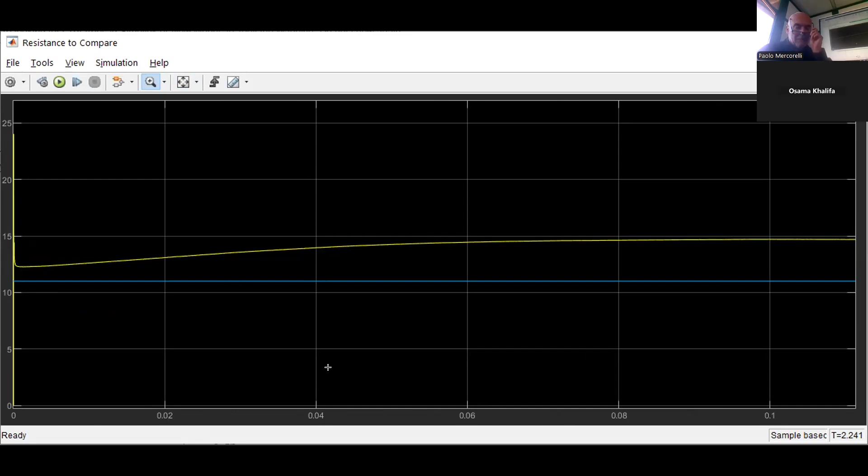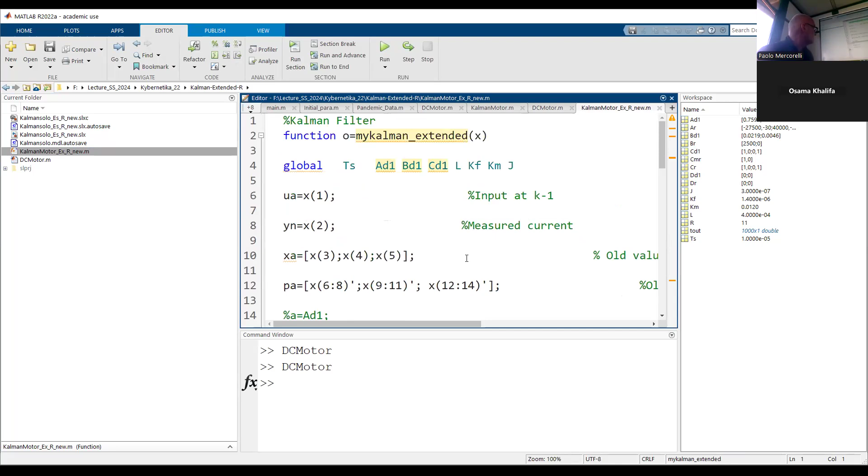Let me look exactly what I wrote in the initial value. Let me go here in the M file, which is where is this one? No, excuse me, yes, it's not embedded. Yes, I copied it basically here.

You can see there's nonlinearity. The current, which multiplies the resistance, the sense is nonlinear. R here.

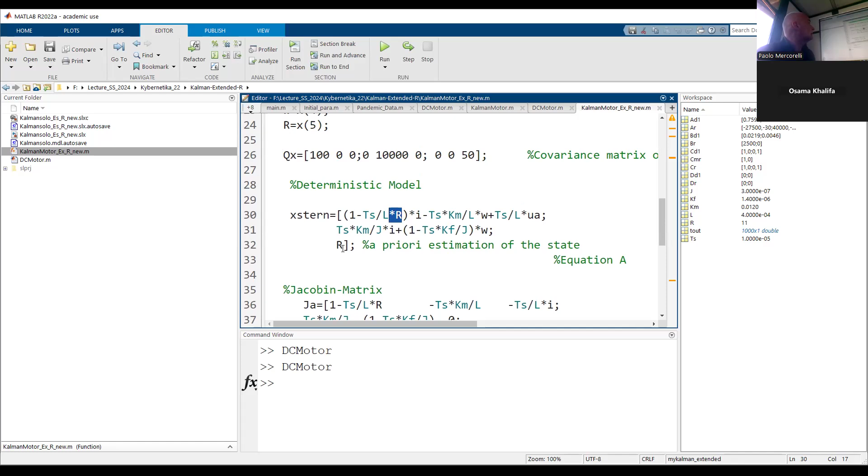Because here we have, look, three variables in the vector: the current, W, and R. X star is exactly my... let me show you.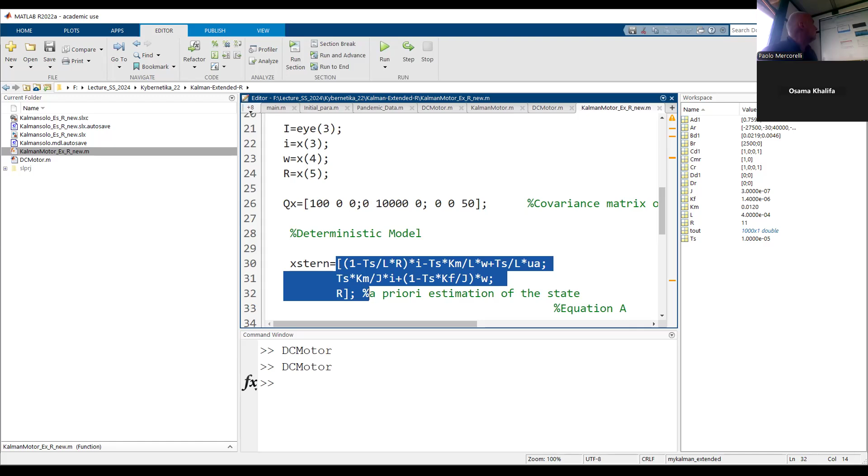The lecture is the lecture. Did you see the lecture here? I close the lecture, I open up here. It's exactly this. Yeah, here's my X. I called it in the file, let me see.

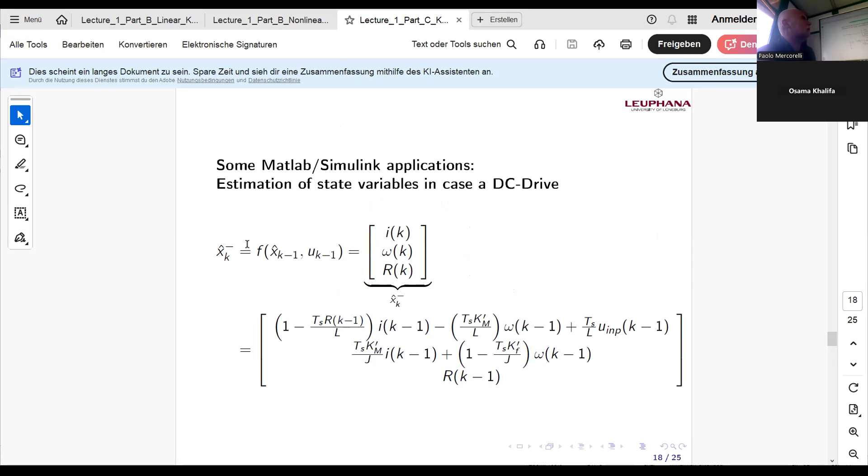X stern, huh? It's also a copy of the file, of the mat file. Then I do the Jacobian, which you can see here. Anyway, it's basically copied.

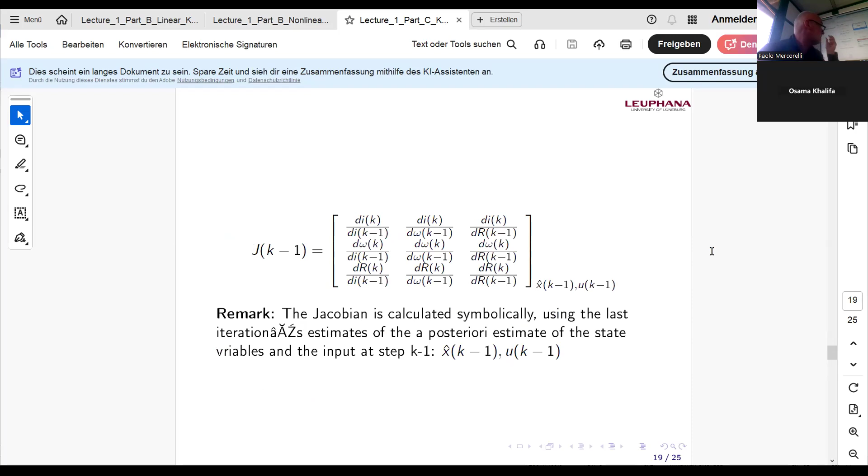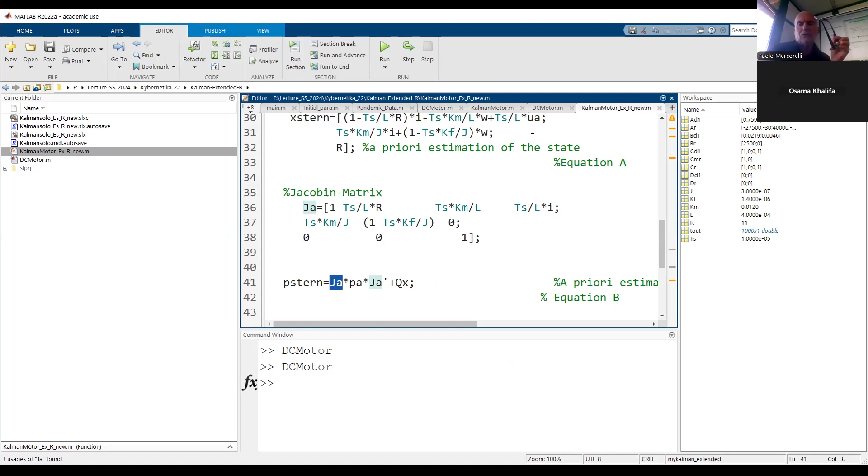Now, to show you exactly what does the Kalman filter, and then we conclude really, I have to go here. Is this one? No, it's this one. I think it's this. Yeah, let me see.

I put 0 resistance, and the error, yeah, extremely large. This means you have seen the reaction extremely.

How to tune this? There is also a criteria, the relative criteria between—I don't have time to tell you, but typically we have to consider an algorithm that is monitoring what I am doing with respect to the measurement and updates. This is fixed once, just at the beginning, then the effect of this will slowly disappear, but the beginning is strong, the first 2 or 3 steps.

Because this Pk-1 at the beginning is P0 and influences P minus, and P minus influences K. But of course, then during the updating, Pk-1 will be updated.

And typically we try also to adjust the Q and R with algorithms, neural networks, or we use particle swarm optimization methods.

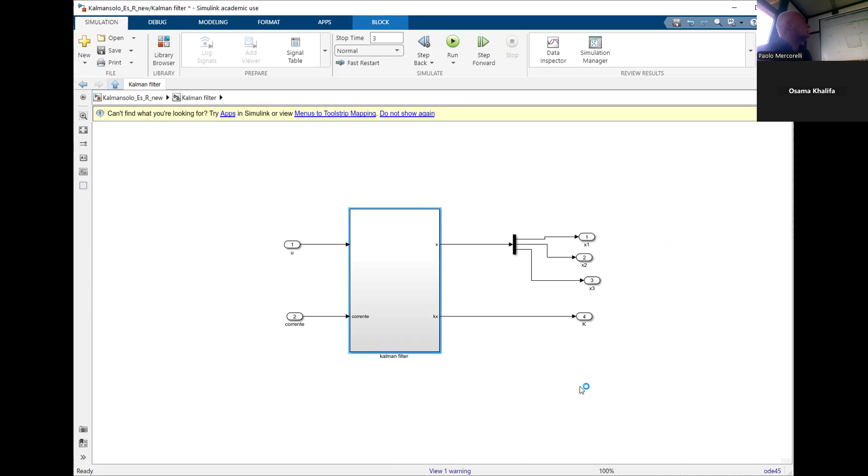Now, if I look at the reaction, it should be slow. Oh, a little bit slower, no?

Try to tune the Kalman filter at home. We can see it is a little bit better than before, no?

But it works also if I say something not realistic. If I put an initial value of the resistance negative, this is physically not possible. We can see that it converges. Do you want to see negative values? You believe me that we get the results, because the Kalman filter works even though we do some stupid error, no? Because a negative initial value of resistance.

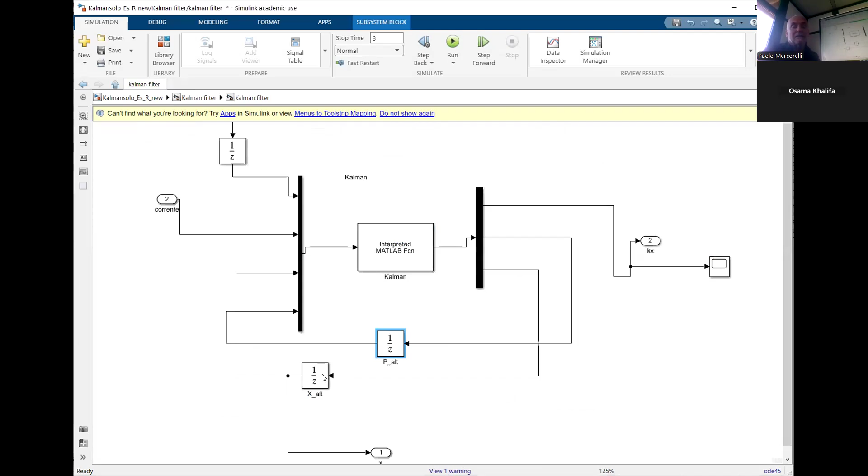Let me show you this, and then we will conclude with this last one. Stop the simulation, yeah. Where is it? Instead of 0, which is still stupid, no? Minus 10. I don't know if it worked. I hope. Okay, no?

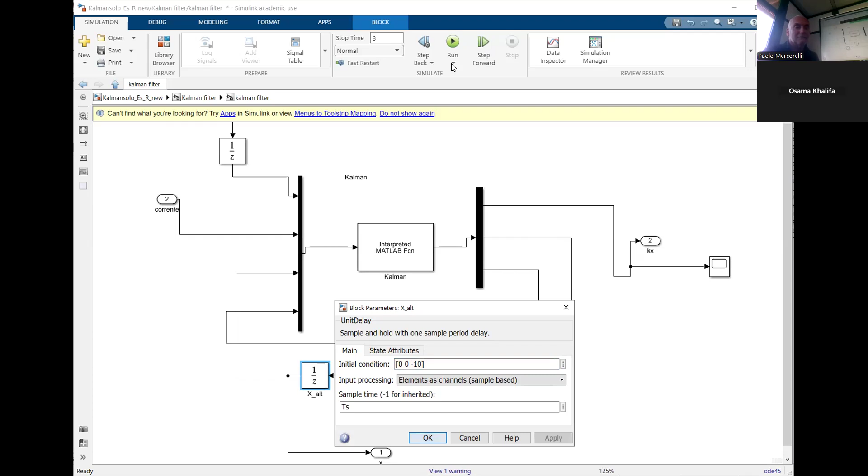But at the beginning it was not better, but I understand. The Kalman filter doesn't work, but we can see that it can help.

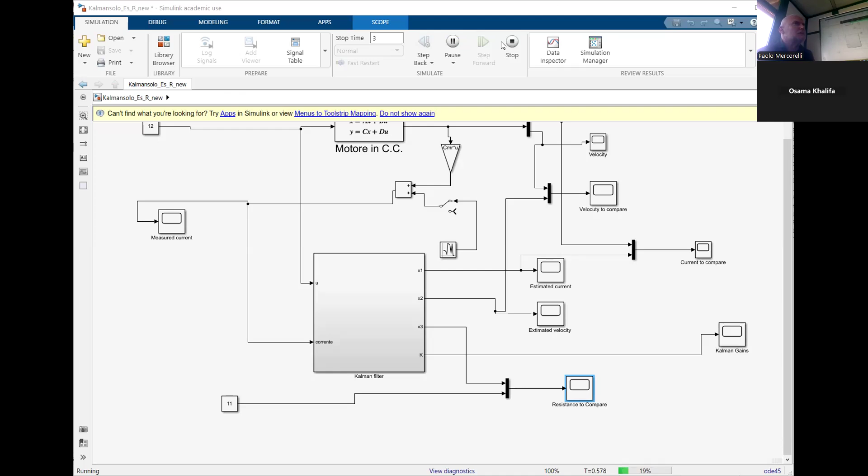Okay, I would like to conclude here for today. Concerning the project, you don't have problems, but it was too easy for you, no?